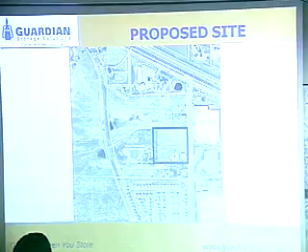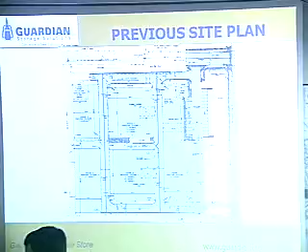We wanted to see if we could come up with something that would still be economically viable to us as operators and make the project worth pursuing, but also address some of the concerns that the neighbors and others had during those public meetings.

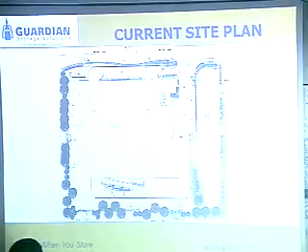So this is the new site plan we are submitting as part of the final development plan. You can see it's 3 buildings. To summarize the significant modifications from the preliminary development plan to what we're presenting today, we've reduced the number of buildings on the site from 5 to 3.

In doing so, we've eliminated approximately 20,000 gross square feet of finished floor area. This allowed us to increase the setback from the southern property line, which neighbors the residential, from 55 feet to 109 feet. We increased the setback from the north property line from 104 feet to 117 feet. These changes also increased the total open space on the property from 20.7% to 36.2%, or approximately 32,000 square feet of open space.

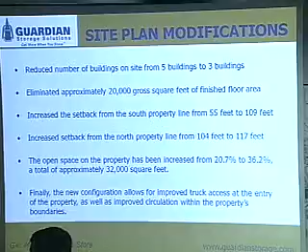Finally, the new configuration from an operation standpoint allows better circulation throughout the site by widening the drive lanes from 28 feet to 30 feet.

So just to go back to the site plan - is there a pointer by any chance? Or?

So, a lot of the same concepts, but it's 3 buildings. Our plan is to phase it in 2 phases. The first phase would consist of the northern half of Building 1, including the 5 incubator spaces, and all of Building 2. Phase 2 would consist of the southern half of Building 1, which is just additional storage, and all of Building 3. One of the main reasons we do this is it allows us to evaluate what the community is renting and demanding, and then refine our unit mix for the future phase to better meet the community's needs.

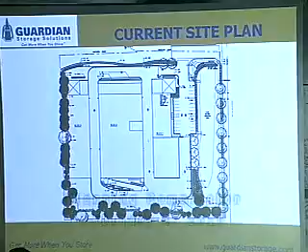The entrance will come from the improvements on the road to the north. The entrance and exit to the property will be right here. The leasing office, where space will actually be leased and business operated from, is on the corner here. Again, the 5 incubator office spaces are right here. There will be a mix of office space on the front with climate-controlled storage on the back, so the tenant can go back and forth between their office and storage space. The storage space would be behind the gated area, so it would be secured that way.

Building 2 is a 2-story building. It does not have an elevator because it makes grade from east to west, so somebody could drive up at grade on level 1 and then drive up around at a higher elevation to floor 2. We also have a covered loading dock cut out for Building 2, as well as a 4-foot loading dock to accommodate a 50-foot truck that needs additional loading capabilities.

In Building 3, there will be a combination of drive-up storage units and interior units. The tenant will come in, access their unit, and at the entry gate they would punch in a code which would disarm the alarm on their storage unit as they come into the property. When they exit, punching in a code actually rearms the storage unit and allows them outside the gate. With that, I'm going to turn it over to our architect, Tom Seibert, who will talk more about the architecture features and the landscaping we've done.

I hope you did notice that we really did increase the landscaping, especially on the south side. We really increased the setback, which gave us a nice opportunity to spread out and add landscaping, providing nice screening for the drive-up dock. We also added landscaping, shrubs and trees along 76.

We pretty much kept it all the same to the north and to the west. We're really hitting the numbers, and as you can see, we don't have any more space to put in more landscaping. We've got so much.

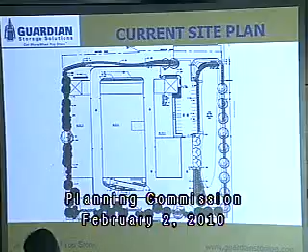The architecture, our whole approach has really been to be contextual, to really fit into the buildings surrounding us, and we wanted to match the rich materials used throughout the area.

We're really looking at grounding our buildings with base courses. They go about 4 feet off the finished floor and wrap around all 4 sides of each building with the dark charcoal split-face block that you see right here.

Then that's broken up with a band of light gray CMU, a 4-inch band, to separate it from the red split-face block. My pointer's not working so well.

Here, and sandstone, which you can see on this tower element, and then we've got the red brick, or the red split-face block next to it.

So you can see here this is the red split-face block, and then we've got the gray CMU, which is a 4-inch band, as I said, separating the two. And we've got Lyons sandstone to match what you've got locally.

Then this tan field that you see is a stucco, and you can see that color is this tan stucco here. We really wanted to break up and create another kind of identity for these flex spaces, so they're highly recognizable from 76, and each user has its own individual feel to it.

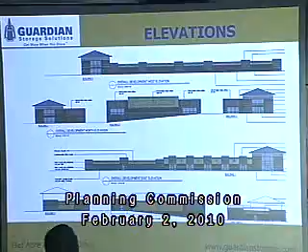I think that's all I've got. Jim Brostwitz is here to answer any civil questions.

Okay, any engineering questions? Okay, that's it. So do any members of the Planning Commission have questions of the applicant? In no particular order?

On the phasing, you're phasing two buildings. Is there anything else to get phased, landscaping, any hardscape that you're not putting in? Is the only phasing the actual buildings themselves, or?

Well, we will need to put in all of the drives to get our circulation around. So I guess the answer is no, we will not be phasing the drives or the site utilities or the landscaping.

Okay. I mean, I suppose if the town was willing to let us phase the landscaping, we'd be open to it, but we thought we would have to put it in all up front, so.

Okay. And then on, I think it's the north elevation, you have several spots for signage. Are you going to, I mean, is the plan to put signs, or why is signage necessary on each and every building?

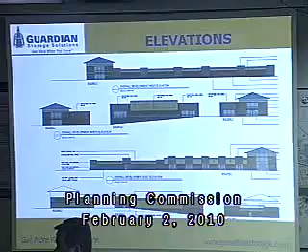We have not fully evaluated exactly what our signage is going to be and where we're going to put it. The site has its challenges in terms of visibility from Highway 36, being 700 feet or so off the highway. Visibility is very important in our business, since drive-by traffic is our number one source of business leads. So we wanted to give ourselves flexibility in the plan to go out there, see where our sight lines were, and put signage in where we could.

So we did have this in the preliminary development plan. Our intention is not to fill all those areas with signage, but we want enough so people can see us, know who we are, know our phone number perhaps, and know that we're in the area. But we were always told from day one that all signage needed to be focused onto the north, so it wouldn't interfere or bother the residential to the south. That's why we focused on the north elevation, and also that's where the traffic is.

Does the reduction in square footage change the economics at all from the town's perspective? Before we made these changes, we sat down with Scott and Matt to get their opinion on how this would be received, and that was the first question asked by these guys.

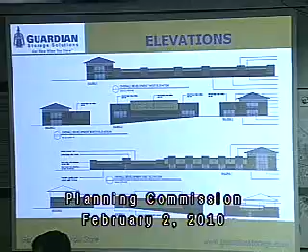The flex space, there are 5 spaces - what's the square footage for each of those roughly? I think the entire unit's about 1,500 square feet, give or take. Our plan is to let the tenant specify the ratio of office to storage space. We're looking at products that allow us to do that, but basically a movable partition between the office and flex in the storage space so the customer can really refine and customize something that works for their needs.

Do you have any place for a bike lock for people who bike in and use the flex space, or employees where they could lock their bikes? I don't have the answer to that. I know in past projects there's a minimum requirement - in our Westminster project we had to put in at least 1 or 2 bike locations. I didn't know if that's something that came during the construction phase, but it's something we could look at. Okay, I'd be interested in seeing that. I think that's a good suggestion.

Is there signage for the incubator space, or is there an intent to allow the tenants to put a sign for their business above the door, on the door, or by the door? Honestly, we haven't gotten to that level of detail on them, but I think that's absolutely something we would do. Nothing that would be illuminated probably, but just something that somebody coming to the incubator space would know which unit was theirs, in addition to probably an individual address.

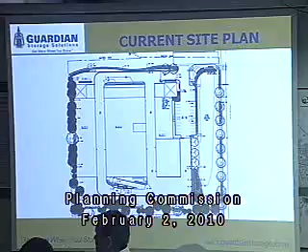And it's an architectural metal fence with black pickets on 6 inches on center. They're like half-inch pickets, and the intent is that they really disappear—you don't see them visually like a chain link fence or anything like that.

Do you have any sense of phase 2? No later date, depending on market conditions. I'm going off the top of my head here, but I think the first phase is about 50,000 rentable square feet. That should take us through 2 years, hopefully not any longer. So the beginning of phase 2 construction would begin roughly a year and a half into the project, given the market is running as we hope. It sounds like it'll come pretty quick.

I just want to follow up on the monument sign. If the monument sign is just for Guardian stuff, how are you going to sign the 5 flex space users? We would probably have signage above each individual door, some kind of nameplate or tag that could be slid in and out and customized for the individual flex space occupant. So someone would describe it as we're at the Guardian Storage property, office number 3. They'd see the monument sign, pull in, see the Guardian Storage sign, see the 5 units, and then see their individual sign.

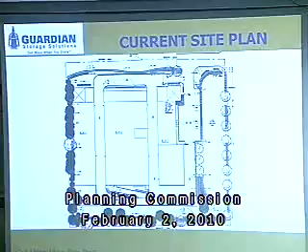I don't know if any of the other consultants have any comments at all, but that's about the only items I wanted to bring up. But it looks like Alex has a comment.

Yeah, just to address your comment about improvements on 76th Street. Alex Arenello, LSC, Town's Traffic Consultant. To remind you, what we're doing on 76th Street, we're narrowing down the section from what it is south of Sycamore. Sycamore, I think, is 54 or 60 feet, and right now it's striped 4 lanes. And that was built when we had grandiose plans that 76th Street would be a 4-lane roadway. So we're going to be transitioning, this will be 36 feet wide. We're adding some pavement on the west side, so we'll end up with a 36-foot section.

But we're going to have a period now, because we're going to have an improved section, then unimproved, then improved again, then unimproved. So that's not going to look too well for a number of years until the intervening properties develop. So that's where we're going to end up. And just as a note, we are looking at maybe restriping 76th Street and perhaps putting on-street parking near the Town 9 Park, eliminating a lane and using that for parking, narrowing the street a little bit. So that's the plans for 76th Street. I don't know if that answers your questions.

So in the course of narrowing it, though, you're going to leave enough room for bike lanes? It could be bike lanes, or it could be a center turn lane, but I don't think we really need that. So eventually, when we have 36 feet, there'll probably be 2 travel lanes and a bike lane on each side; that was probably a good section.

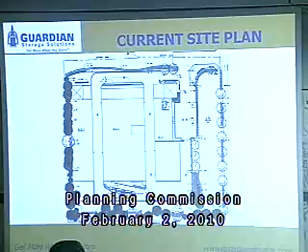Any impact from the drainage flowing into the street on the unimproved sections of 76th Street? No, the drainage coming from off-site on the west side, and then flowing around to the north around the building, will be carried on site in a ditch on the south side of A Street, the unimproved part of A Street. Up to the point where it is improved, it'll be picked up in an inlet and carried to a storm drain. I could show that to you if I had the pointer. So that's been cleaned up nicely, that was brought up a couple times before.

Just a real quick comment about the landscaping on the south and east or west elevations. What you see on their landscape plan, on the south elevation, we counted up real quick, those larger evergreen trees, there's about 10 of them, and their minimum size installed is 10 feet. Oh, I thought it said 5.5. It says 10. Oh, it does? Okay, so I mean, I would be okay with that, decent. I thought I saw 5.5 feet for those.

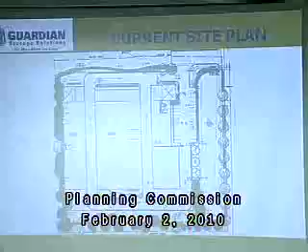Yeah, there's some on there that are 5.5 feet, but the main clustering, the larger ones, are minimum 10 to 12 feet. Yeah, we've got 24 of these pines that are 10 to 12 feet. Okay, I'm good with that then. Thank you, so no need to further emphasize or make changes to that.

Okay, okay. Must be time to vote. All right, should I dive in?

Sure. Move to approve Resolution Number PC-2, Series 2010, a resolution of the Planning Commission of the Town of Superior, approving a final development plan for Guardian Storage Solutions, case number FDP 2009-1, with the following conditions.

Is that a question? Sorry, FDP 2009-1? Yes. Since it got started, came in, is it 2009? Okay, this one, and it was the first one of 2009.

I just thought this was FDP. All right, condition number 1: make minor technical and red line corrections to plans as identified by staff. Number 2: drive lane wall lights are to be turned off half an hour after closing; entry lights and parking lot lights to be dimmed after 12 a.m. Number 3: monument signage lighting to be switched off by midnight, no later than midnight. Number 4: to work with town staff to define maximum tenant signage size and locations. Number 5: to add appropriate bicycle parking as agreed to with staff.